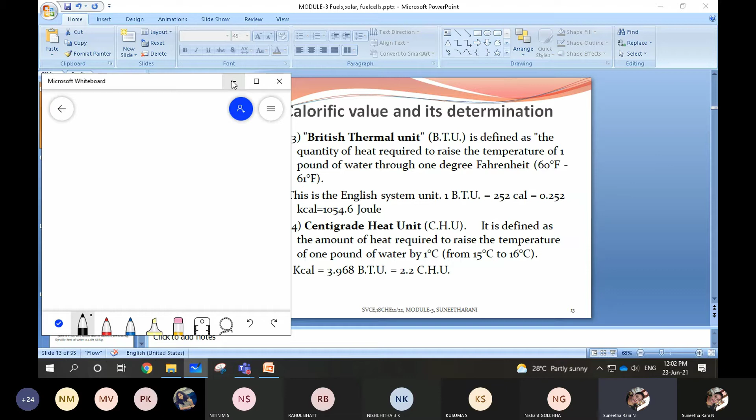Right, what we discussed in the last class, I don't want to waste time. Those who have joined early will start. Last class we discussed about the calorific value, correct?

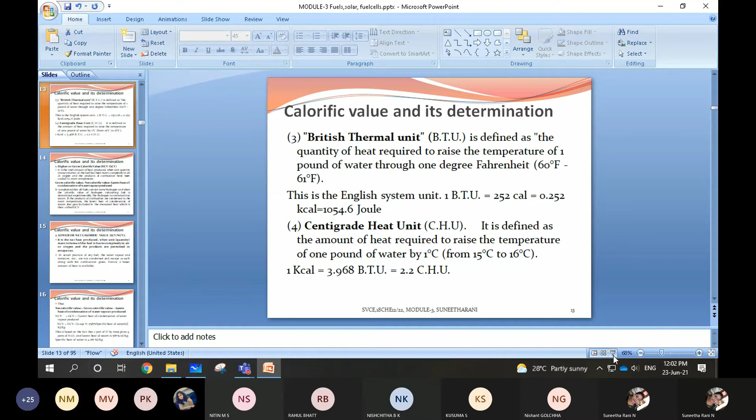The amount of heat liberated when a unit mass of fuel is burnt completely in air. Completely in air. How is it represented? HCV, how is it represented?

Let me call Momin. Momin Rasul. Momin, yes ma'am. How is HCV being represented?

Ma'am, you mean unit? Not units, Joule. How do you have to measure? How are you going to measure HCV?

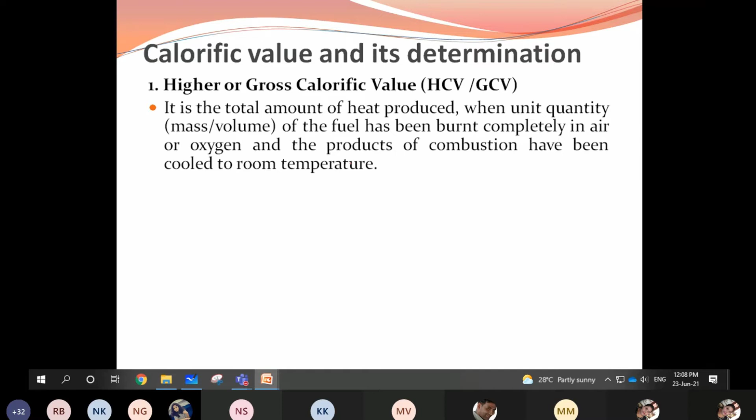See, last class you people didn't write the points. I'll just glance quickly over what has been done in the last class. Just write down any points if you feel they are important. So characteristics are not required.

The characteristics of a good fuel - what we have done is characteristics. If the fuel we are saying is good or bad, it depends on what characteristic properties it has. These include moderate combustion ignition temperature, very fast ignition, low cost, cheaply available, and very easy to handle, easy to store and transport.

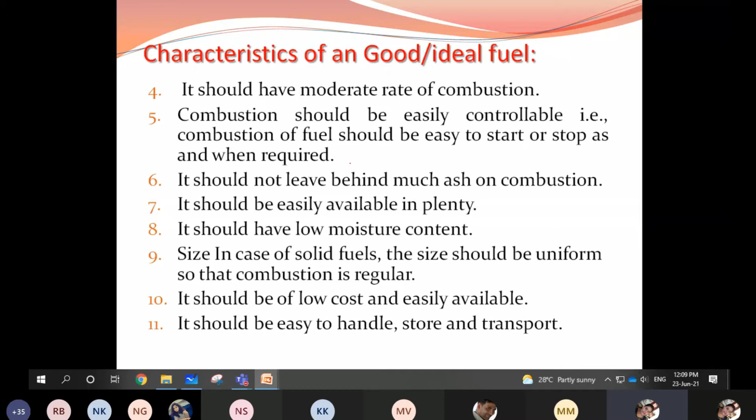It should contain low moisture content and be easily available in plenty, the quantity should be very large, and it should not leave behind much ash in the environment. These are the characteristic properties a good fuel should have.

The next is the calorific value. Calorific value is a measure of value - the total quantity of heat liberated when one unit mass of a fuel quantity...

When 1 unit mass quantity of fuel is burnt completely in air, along with the moisture and in the presence of air and oxygen, the calorific value is being calculated.

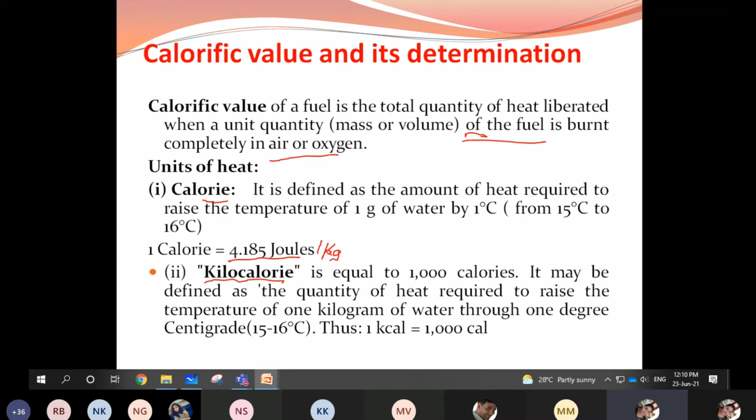This calorific value is expressed in terms of calories, and 1 calorie is around 4.185 joules. It can also be expressed in kilocalories, which is joules per kg. So there are two types of units: British thermal unit and centigrade heat unit.

British thermal unit is defined as the quantity of heat required to raise the temperature of 1 pound of water through 1 degree Fahrenheit, from 60 to 61 degrees. So 1 BTU is equal to 252 calories, that is 0.252 kilocalories.

You should remember this 0.252 value, and also 1054.6 joules. In terms of calories or kilocalories it is 0.252, and in terms of joules it is 1054.6, according to British thermal unit. According to centigrade heat unit, 1 kilocalorie is 3.968 British thermal units, which is equal to 2.2 centigrade heat units.

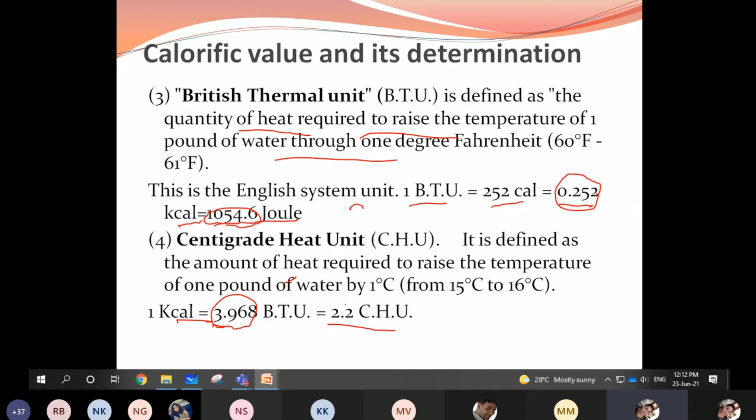This calorific value is determined as higher calorific value, HCV, and GCV are not different. HCV and GCV both are same. GCV is gross calorific value, and HCV is higher calorific value. This gross calorific value is represented as I wrote yesterday.

The gross calorific value or HCV is equal to NCV, net calorific value, plus latent heat of steam or water vapor. By using this equation you can easily calculate the GCV or HCV.

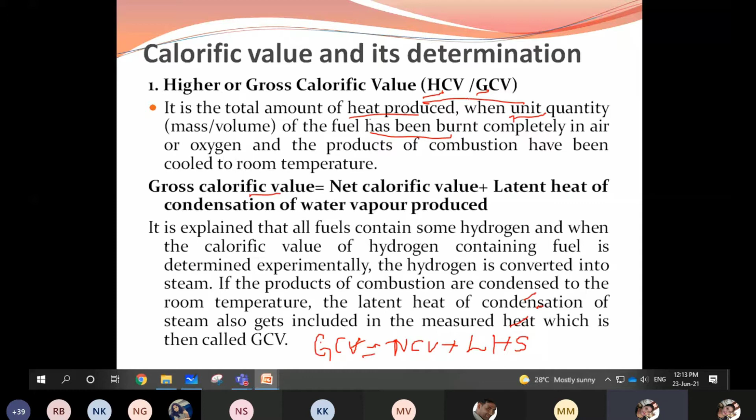GCV is the total amount of heat liberated, the total amount of heat produced when one unit mass or volume of a fuel has been burnt completely in air or oxygen, and the products of combustion have been cooled at room temperature.

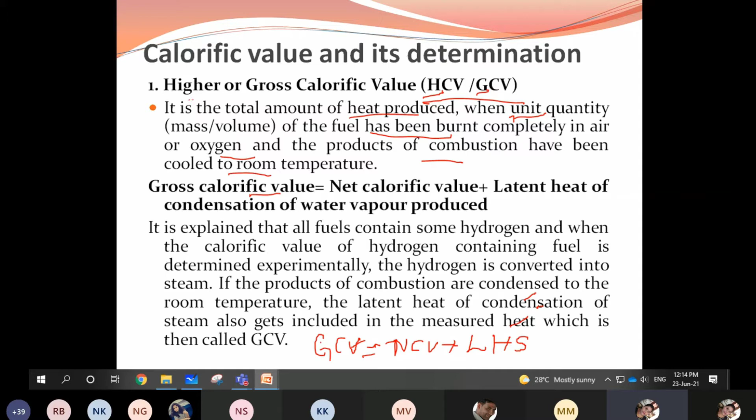The net calorific value, or lower calorific value, is the amount of heat liberated, that is the gross calorific value minus the heat of condensation of water vapor produced.

When you subtract this value from the gross calorific value, GCV, you end up with NCV. So NCV is the amount of heat liberated only by the fuel, calculated by subtracting the latent heat of vapor, represented as 0.09 into H, where H is the percentage of hydrogen present, and 587 is the latent heat of steam in kilocalories per kg.

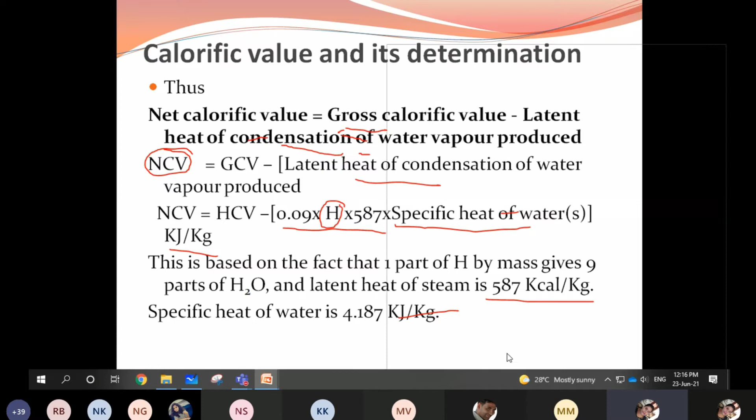Next is calorific value and its determination using a device called the bomb calorimeter. The bomb calorimeter is a device used to measure the calorific value of a fuel.

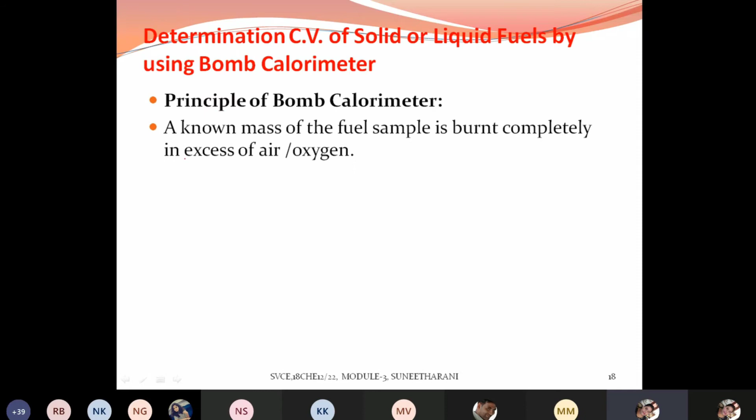By using bomb calorimeter, what is the principle used? The principle of bomb calorimeter is to measure the calorific value of a fuel. For a known mass of the fuel, how much heat is liberated, what is the heat lost by burning of the fuel, and what is the calorific value liberated during this burning, that is calculated by the measured data.

What is this principle? How is this bomb calorimeter constructed? The bomb calorimeter is constructed with a steel tank. The construction part I have not explained yesterday, right? So the construction part you can see here.

Here it is a pointer. See, this is the steel tank. Inside this steel tank, can you see red color? I am drawing one line. Is it visible? Yes ma'am, visible. Say that it is visible. Okay, I'll write here, no problem.

See, first it is constructed with the steel tank, it is this steel tank.

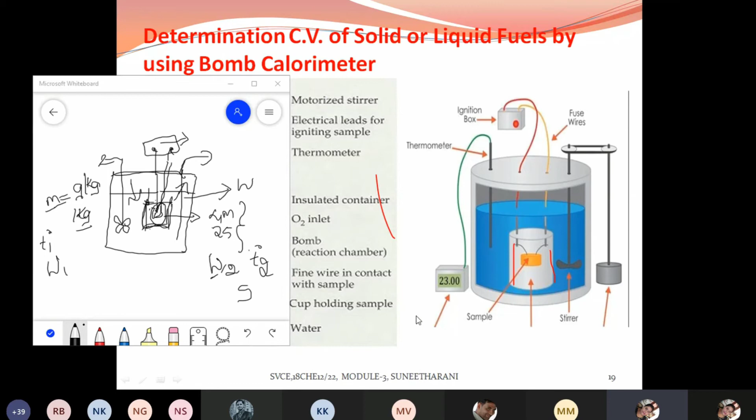Once you have noted down all these things, now you have to calculate. This is the construction and working part of this bomb calorimeter. So exactly the bomb calorimeter looks like this. Inside the tank is the sample holder where you have to place the sample, it is ignited, and you have to calculate how much heat is liberated.

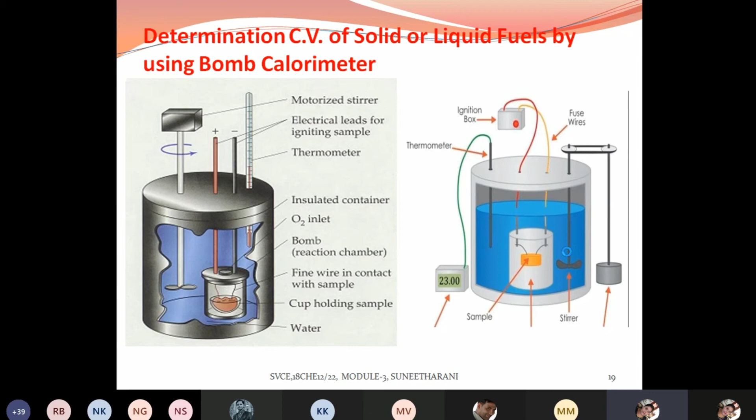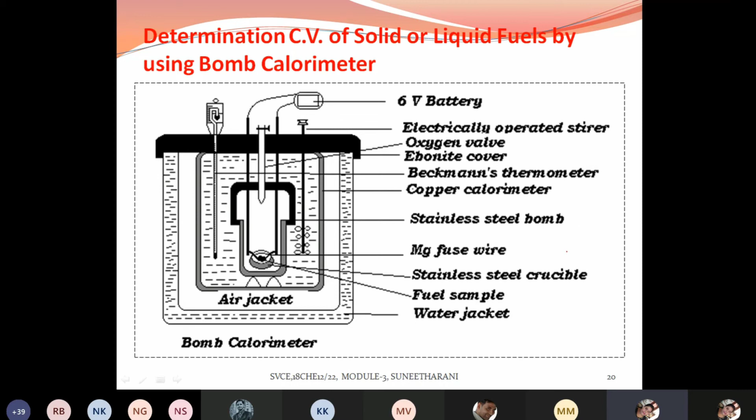So if you have to write the diagram in the exam, this is it, next I'll tell you. This is the construction part and also the working part of the bomb calorimeter. They'll ask: explain construction, working, and how you are going to measure the calorific value using bomb calorimeter. So these things you have to write. Here is the diagram you have to write in the exam showing how the bomb calorimeter looks. Next, construction is done, working is also done, and then calculation.

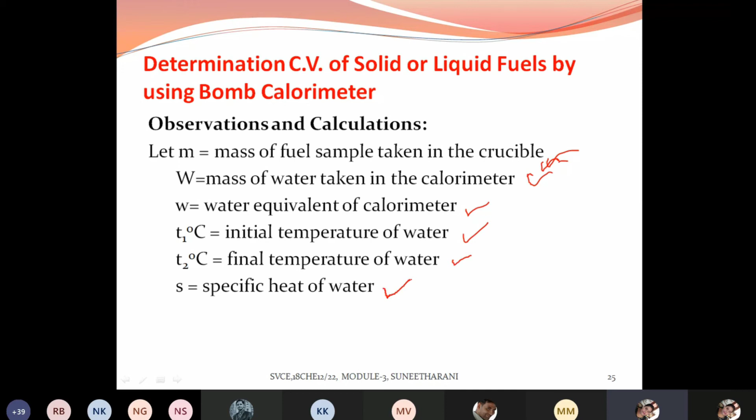So after noting down all these points - mass, W1, W2, T1 degree Celsius, T2 degree Celsius, and specific heat of water - substitute in this equation. This is the heat absorbed equation. Substitute in this equation to calculate GCV. GCV is calculated using this equation.

And to calculate NCV: GCV minus 0.09 H into 587, times 4.187 kilojoules per kg. By using these equations, you have to calculate GCV and NCV. Understood?

In some of the numericals, they may ask to calculate HCV and NCV. But whenever they ask HCV, it is nothing but GCV only - by using this equation only, you calculate GCV. If they ask NCV, you have to calculate using this second equation. So for HCV use this one, and for NCV use this equation. Is this clear?

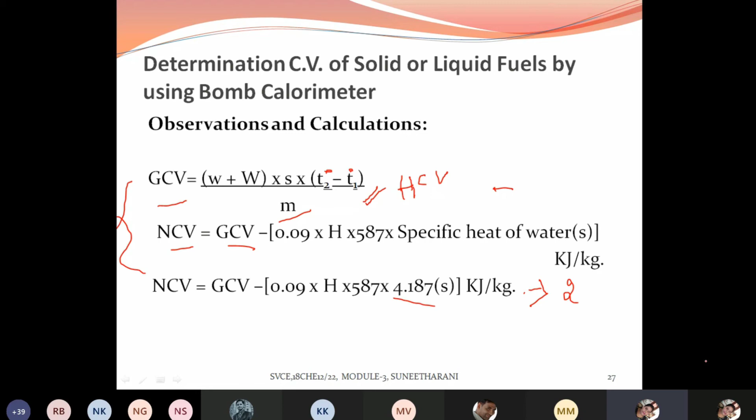Problems will be taken up at last.

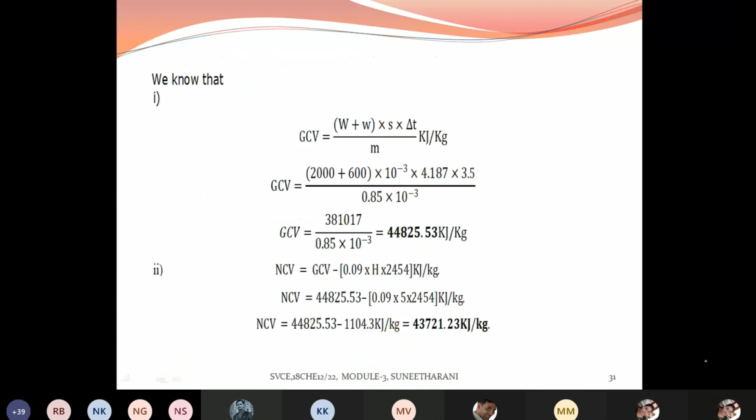You'll do problems now only, or we'll take up last? We'll do one problem. Okay, fast, decide fast.

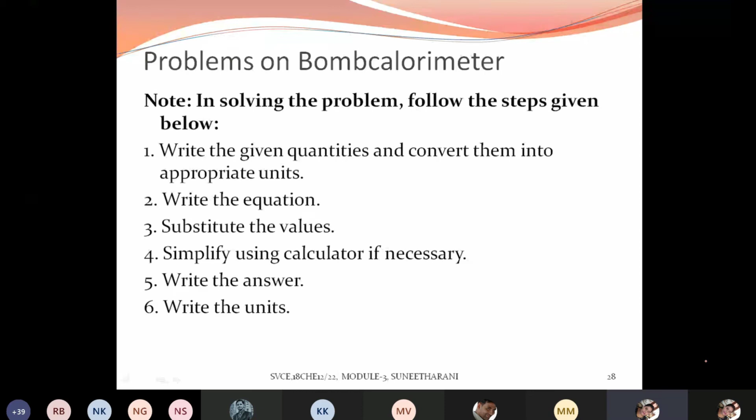Ma'am, at last it will be better. Will you remember all these things, points till last? Yes ma'am, and we will revise at that time also, so it will be easy at last. At last of this module we'll take a problem. At that time we can revise and it will be easy.

Fine, after this bomb calorimeter and calorific value, next comes knocking of petrol engine. What is knocking? What is petrol? How are we going to represent this knocking?

How many of you ride a bike very easily? Bike or car, usually bike. How many of you know riding bike? Raise your hands, girls, boys. Usually boys will be very good experts in riding bikes, correct? How many of you know riding the bike? At least raise your hand, unmute your audios and talk to me. Yes ma'am, we know, like that. Nobody knows in your class? Most of them will know ma'am, most of them will be knowing, girls also.

So I'll tell you what is the relationship between riding the bike and this knocking. What exactly is knocking in a petrol engine? During riding of the bike, sometimes you feel a rattling sound, some noise coming from the engine. Suddenly you feel that sound, some noise in the engine, or suddenly the engine will stop. Again you have to kick start and start, and suddenly in the humps and brake stoppers you will feel that jerk type of feeling. Jerk means suddenly it will stop and start, it will not move properly.

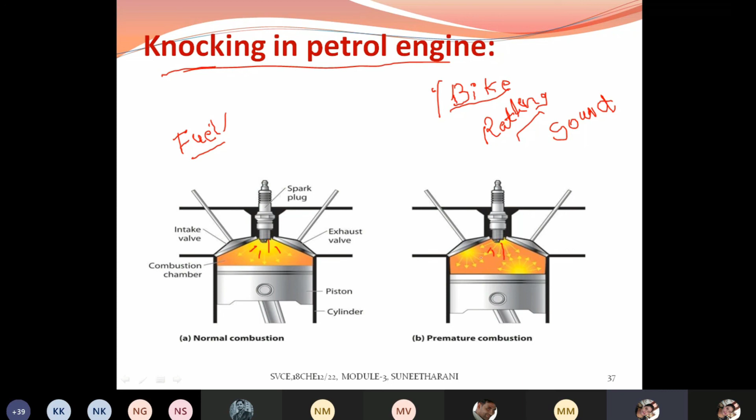I have shown you two pictures here. One is the normal combustion, and this is called premature combustion. As the fuel is coming here, properly it is combining and burning, you can see the yellow color light, properly and uniformly burning. But here, when the fuel falls into the engine, there is no proper movement of the fuel, it is combined improperly, there is no uniformity in the burning process. This not forming uniformity, or not properly combustion happening in the IC engine, this process is called knocking.

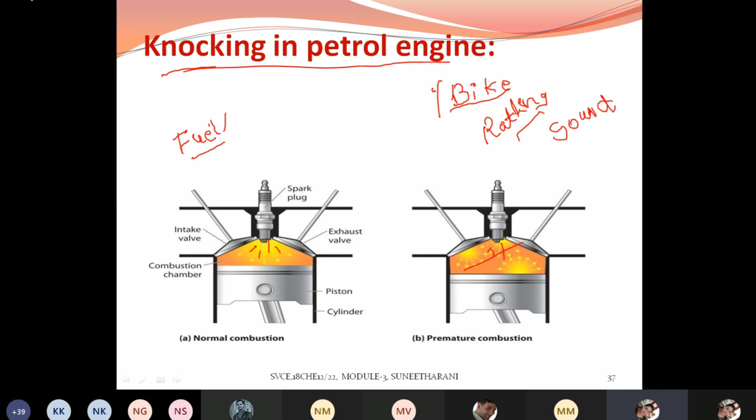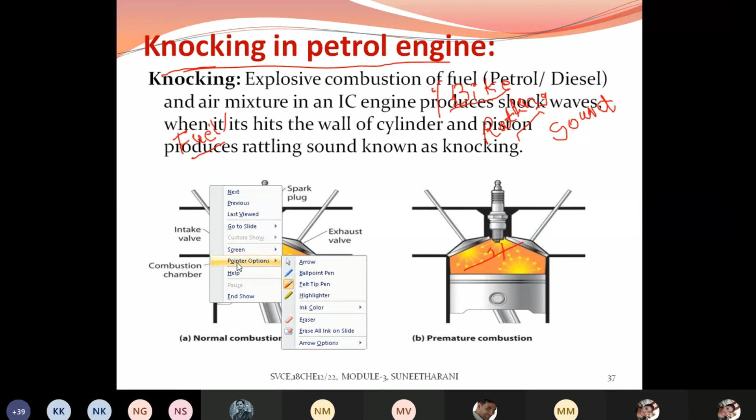So the exact definition for knocking is: knocking is an explosive combustion of a fuel, petrol or diesel and air mixture, in an IC engine, which produces shock waves when it hits the wall of a cylinder and piston, producing a rattling sound known as knocking. Remember this.

Definitely there will be a question: what is knocking, and explain its mechanism, for 8 marks in the exam. This knocking is nothing but production of a shock wave or a rattling sound because of explosive combustion of the fuel in an IC engine. So this is called knocking. If you want to write down this knocking definition, write down this.

Don't write the diagram like how I have written on the whiteboard. Write neatly, you have a scale and pencil, everything you have, use that and write the diagram neatly and label the parts because that carries 3 marks. Don't say, ma'am, it is like that only.

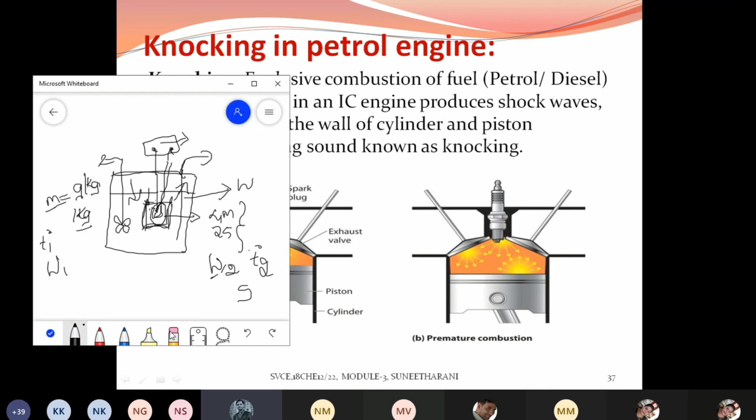So the mechanism of this knocking we'll discuss in the next class, only the definition I have explained today. Knocking's mechanism is very important, how this rattling sound occurs because of improper combustion of the fuel, that mechanism you have to follow. Only 4 steps or reactions are there that you have to remember for the mechanism, that we will discuss in the next class. Write this definition, all of you.